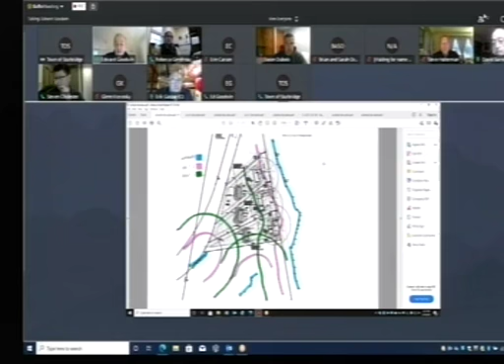Starting with Stephen. Stephen Chittister in favor. Eric Gaspar in favor. Steve Halterman in favor. David Barnicle in favor. Ed Goodwin in favor. Thanks, Becky, for catching that.

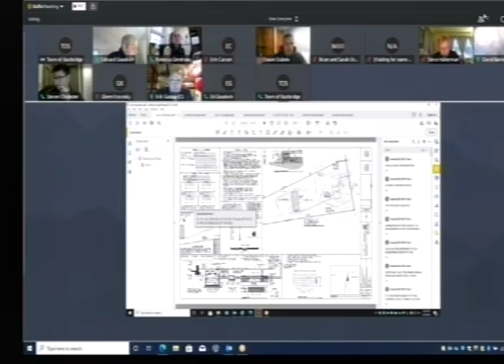What is the time? Right now it's 6:36. Yeah, no, I'm just checking the next hearing starts at 6:35. We are right on time.

We have 20 Cedar Lake Drive, notice of intent, raise and rebuild. No, you just skipped. You skipped number 3. Which one is it? You're at number 5, okay, which is 11 Putnam Road. All right, 11 Putnam, sorry about that.

So we're going to go to notice of intent for 11 Putnam Road, construction of a single-family home and associated site work. Becky, you want to? Sure. So this is a local notice of intent, just subject to our Sturbridge wetland bylaw.

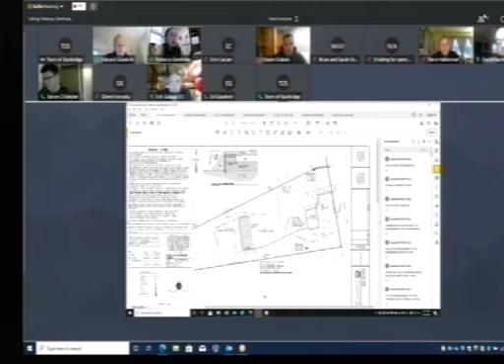We already covered the 100-foot buffer zone, which is just projected on a portion of this site. This is one of the lots, the one to the south, which does have buffer zones projected from the 3 wetlands on site. My recommendation would be to approve the project at this time as shown. As I stated in the previous public hearing, I did go out and do a site visit.

This is an existing hayfield. All work is within that hayfield. The site gently slopes to the left of the plan here, which is the west. I don't have any concerns with the proposed project.

I'd recommend that an anti-tracking pad be installed on the site, as we discussed before, and that sedimentation controls are included at the limit of grading shown on the plan, because there isn't a limit of work shown here. So the limit of grading shall serve as the limit of work for the project too.

That's all. All right, thank you. Jason, anything? No, I don't have anything to add. All right, great, thank you.

David? One question, not comment. This is David Barnacle. I'm kind of curious, Becky, about the approval with the land sloping to the left of the way this is set up on the screen. Isn't that going to offer the opportunity for runoff, after it's completely put into a house lot with lawns, etc., for runoff to go down into the streams?

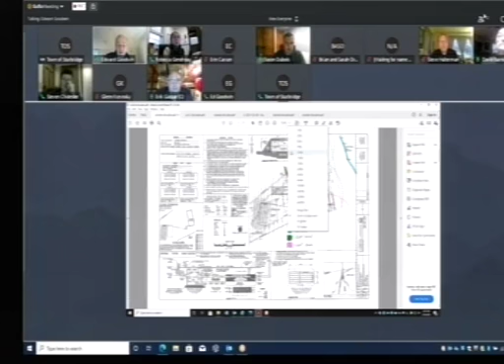Now, do I have a motion on the board? I'll make a motion, Mr. Chairman, David Barnacle, for 11 Putnam Road for a local NOI with the notes as indicated by Rebecca. Eric Gaspar, second.

All right, discussion. Hearing none. Eric, how do you vote? Eric Gaspar in favor. Steve Halterman in favor. Stephen Chittister in favor. David Barnicle in favor. Ed Goodwin in favor.

All right, thank you. On number 11. We're now on to 13 Putnam Road. SWB, notice of intent, construction of a single-family house. Becky?

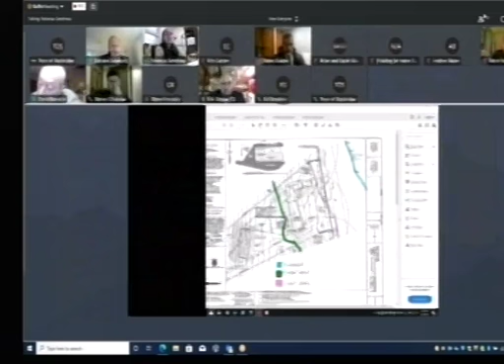All right, I'm just going to share my screen again. So this is the middle lot, and as you can see, we've got the coloring on here. We've got blue wetland flags across the street. We have the 100-foot pink buffer zone shown here, and then the 200-foot here. So the house and driveway portion of this project is within jurisdiction.

Just a note, in my detailed agenda I put 3 wetlands for this one too, but it's just the one wetland. Same thing, I would recommend approval of the project, issuance of an order of conditions with our standard conditions, as well as the anti-tracking pad as previously discussed, and that sedimentation controls are included at the limit of work. The limit of grading shown in the plan, and the limit of grading shall serve as the limit of work for the project.

All right. Jason, do you have anything to say? I do not. Okay, thank you.

Discussion. David? No questions, Mr. Chairman, this is David Barnacle. Stephen Chittister, no questions. Eric, no questions. Steve Halterman, no questions. And Ed Goodwin, no questions. Okay, hearing none.

Jeff, could you see if anybody in the audience would like to speak to 13 Putnam Road, please? Good evening. Is there anyone in the audience that would like to speak to the 13 Putnam Road local notice of intent? Nope, no one's out there.

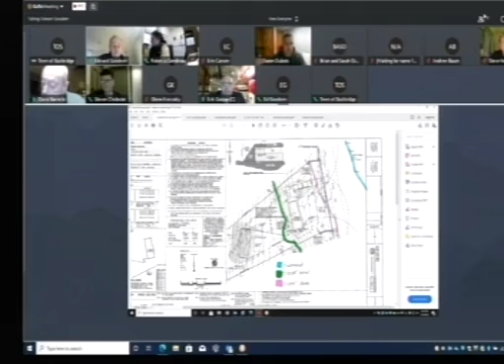Thanks, Jeff. Do I have a motion to close the public hearing? So moved, Steve Halterman. Moved. And Eric? Second. Seconded. Any discussion? Seeing none, Mr. Barnacle, how do you vote?

David Barnicle in favor. Stephen Chittister in favor. Eric Gaspar in favor. And Steve Halterman in favor. And Ed Goodwin in favor.

Do I have a motion from the board? Mr. Chairman, I will make a motion that the board approve 13 Putnam Road, a local notice of intent, with all of the notes as indicated by Rebecca. Do I have a second? Sure, second. Eric Gaspar seconds.

Any discussion? Seeing none, Steve Halterman in favor. Eric Gaspar in favor. David Barnicle in favor. And Stephen Chittister in favor. And Ed Goodwin in favor.

All right, we are on to 15 Putnam Road. Becky?

All right. Let's see. No, that's this one. All right, don't have a colored one. Actually, I have a... Is this the right one? Mm-hmm. All right, so here we go.

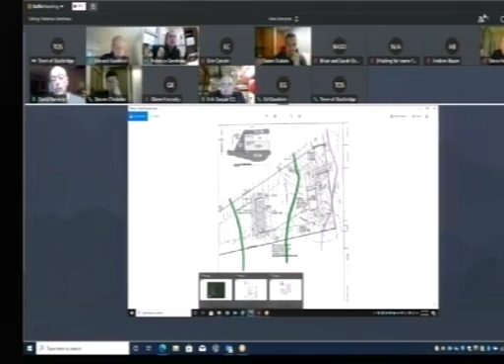Here's the colored plan. You can see we've got the buffer zones. You can't see the resource area on the opposite side of the road. We've got the 200-foot buffer zone, which has most of the work within it, and we do actually have part of the... oh, never mind, I'm sorry, this is the wrong one. Wrong one. Sorry.

Yeah, we'll just go back. This is lot C. I just don't have a colored one ready to present to you. But as you can see, we have the wetland across the street. We have the 100-foot buffer zone projected on the site, and then we have the 200-foot buffer zone projected right in the middle of the site.

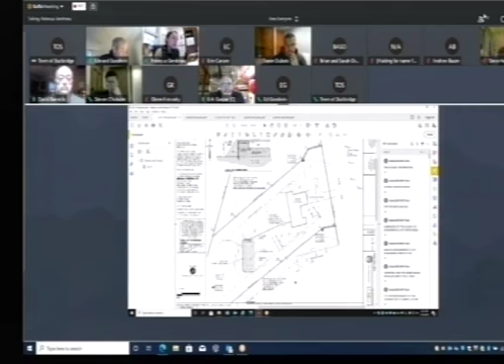Same as the last ones. Existing agricultural fields, everything slopes to the west. Wetlands are on the right side of the road. Most of the work is outside the 100-foot buffer zone. The middle or back portion of this lot is not within jurisdiction.

I would recommend approval of the project as shown, with our normal standard conditions, as well as the anti-tracking pad we discussed with no millings, the addition of sedimentation controls, and that the limit of grading shall serve as the limit of work for the project.

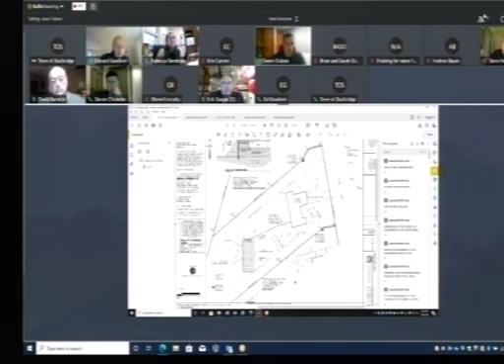Any discussion? Jason, you're all set, right? I'm all set. Thanks, Rebecca.

David, any questions for Jason? Jason, how did you get away with this so we have no questions? I have no questions, Mr. Chairman. Stephen, anything? Nope, all set. Eric? No, I'm all set. David stepped on my joke — I was going to say I have a real problem with this one, but the others are fine.

Steve? Steve, you all set? Yeah, I'm all set. Thank you.

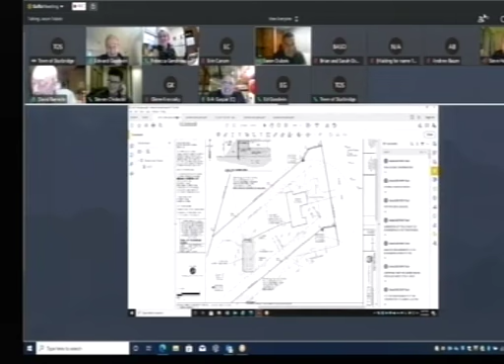Oh, I have a question, Jason — why is this one not colored? The colors definitely make a presentation. Do we do the colors? No, I just couldn't find that one. Eric's been doing the colors on the plans. Oh really? It helps, it makes it nice and clear.

All right, so anybody in the audience? Good evening, is there anyone here to speak to the 15 Putnam Road local notice of intent? Okay, there's no one out there to speak.

Thanks, Jeff. I have a motion to close the public hearing. So moved, Steve Holderman. Steve Holderman, second. Eric seconds.

Any discussion? Seeing none, Steve, how do you vote? Steve Holderman in favor. Eric Gaspar in favor. David Barnicle in favor. Stephen Chittister in favor. And Ed in favor.

Do I have a motion? Mr. Chairman, I make a motion that we approve the 15 Putnam Road local NOI with the notes indicated by the agent. Do I have a second? Eric Gaspar seconds.

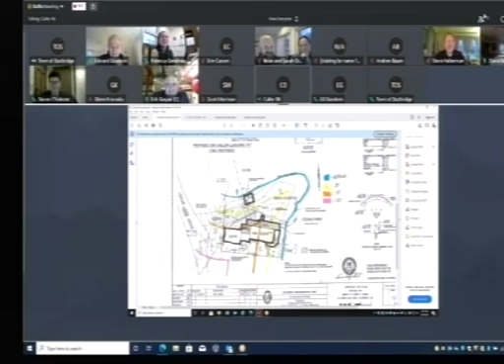Getting back to this — the property was owned by Brian and Sarah Oxman, located at Cedar Lake off Cedar Lake Drive. They originally purchased lot number 20, which had total coverage at the time of roughly 34%, and later purchased lot 13 beside them, giving a total area of 13,650 square feet.

It becomes a little misleading when you look at the zoning for the suburban residential district — the original coverage was 17.22%, and now we're going to 23%. The figures don't lie, but liars figure: the property they originally owned, lot 20, actually covered 34%. So what they really did, in January with Davis and George in Sturbridge, was record a plan done by DC Engineering in Worcester that brought the property up to 13,500 square feet.

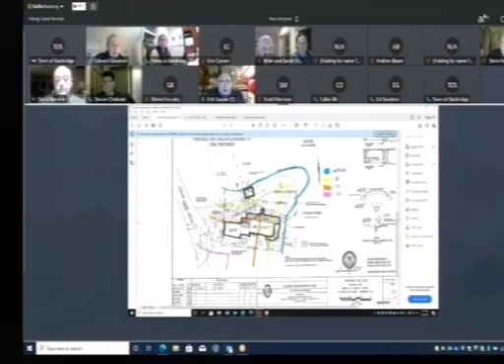David, did you have something you want to say? I need a second. Do I have a second to the continuation, Eric?

I'm a little confused as to why we would go and do anything without ZBA weighing in, because it seems like an incredible waste of our time to put a decision in place and need their weigh-in. If they're not going to approve the lot as a conforming situation, we will have gone through a tremendous amount of effort for nothing, and the Oxmans will go through alternative plans that will cost them money as well. I think the best course of action would be to continue this until the first week in May, have them go in front of ZBA on April 21st, and then allow us to have a productive discussion. Continuing it just to continue it will waste everybody's time and the Oxmans' money, which I don't think is fair.

Let me give you an alternative point to that. They come before our board with requirements. If they bring us the requirements we ask for in coming to the board, we need to look at them and give our input. If you do the board thing, they can go round and round and round, and that's not fair to the applicant. I admit the engineer should be given guidance on what he thinks he can get past and what he can't, but that isn't something we should be doing. We should set it up so they can come before us. If they don't want to come April 6th, they can come some other day, but if we have that date available, I feel we need to entertain them.

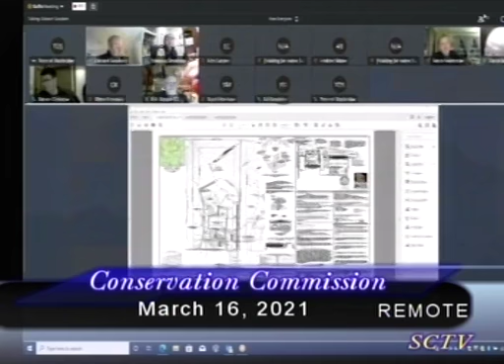Okay, so this is a local notice of intent that we received. I've got it up on the screen for you. Upon review, it came to our knowledge that this property was a lot that had been divided off, but then an A&R plan was submitted and it was rejoined to a larger property. So we had the question about the application including the 566 address and an abutters list for 566, while the plan references this as an existing property line. We did ask that question to the engineer, and I'll go into that a little bit more.

Overall, this is a site we have been to. I did go back out just to check that none of the previous conditions had changed. Nothing had changed, just that they had done the perk test out here. What we're looking at in green is our 200-foot buffer zone. We also have a 200-foot vernal pool offset shown on the plan, right where my cursor is. They're not proposing to do any work within the vernal pool offset. You can see that about half of the development of this lot is within the 200-foot buffer zone.

They do show BMPs during work, and in addition, some BMPs on the site afterwards, including infiltration for impervious surfaces, including roof runoff and the driveway. One question I had was whether the infiltration on site was for the entire roof surface or not. I'd also recommend the inclusion of an anti-tracking pad on the site.

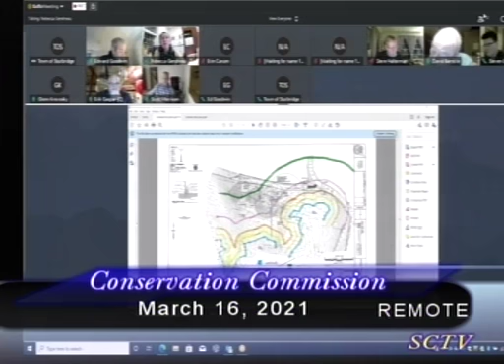We'll start off with Becky. Okay, I'll pull up the plan for this. So this is a notice of intent we received. It's for the development of a single-family house and associated site work to include an on-site septic system and well, as well as a barn. The property as part of the application is actually 91 Clark Road, which the NOI was filed for, but also 97 Clark Road, as where we're looking at the driveway. The project proponent is working with the adjacent property owner to purchase a portion of that property in an effort to locate that driveway further from the wetland there.

So we actually are looking at this time work on two separate properties that wasn't originally included with the notice of intent. It was just for the 91 Clark Road. It's my understanding that the A&R plan was filed with the planning board and approved, but I haven't been notified if it's been recorded yet. So similar to the last project, we have work on two different properties that weren't reflected within the notice of intent. I didn't realize it until after we already drafted the legal ad and added this to this meeting agenda. But since my understanding is they're working towards making this one property, once that A&R is recorded, then we will have the one property address. So for that reason, I'd recommend a continuation to have that resolved.

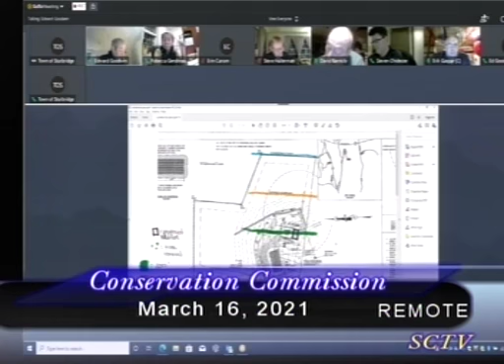Becky, we're on to 14 Wildwood. Correct, yep, so this is a request for a wetland bylaw letter permit for 14 Wildwood. I have the plan up here for you to see what we're looking at.

Wildwood is a private road, runs down the bottom portion of the plan. This was the plan when the house was built, which we found and provided to the current owner. We have an existing driveway that comes back, single family house here, septic system in the front. What they're proposing to do—we have the wetland edge from that plan shown in the back, with the 100 foot and 200 foot buffers. So what they're looking to do is remove, it's 5, maybe 6 trees. One of the trees is right on the edge of the buffer zone here within jurisdiction. They're also putting an addition onto the single family house right at the 200 foot buffer zone.

Outside of jurisdiction, they will have a driveway that accesses the new addition, as well as some tree removal pretty far away from the resource area. So they'd like to move forward. Their plan right now is to remove the trees at this time, and they're still working on their final plans for the house addition.

We did do a site visit out here. I would recommend, I don't have any concerns. All the trees were flagged, and we did see them back there. Most of them were dead, or had some health looking concerns to them. And they're pretty far from the wetland. All the rest of the site past here is all forested upland area. So I would recommend at this time to approve the project.

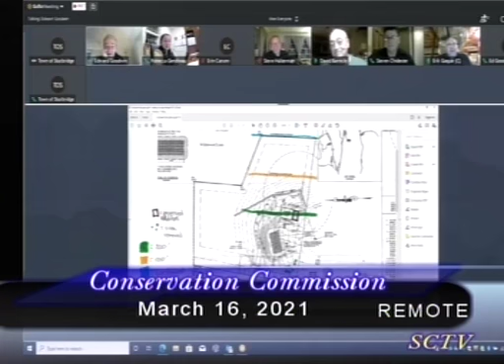Well, rain or shine, I can make it both days. Oh man, you are the mountain man. I'm an ex-field biologist with so much foul weather gear that I can do anything.

Yeah, Becky, breaking it up into 2 is probably better for me, so I should be able to make both those dates.

Eric, you're not going to be here for the 23rd, right? No, but I can make the 30th, I have that in my calendar. That's what you've got, Beck. That's pretty good. Okay, thank you guys.

I'll send out an email on Friday with a schedule, and I'll keep the 91 Clark and a couple of the smaller ones that I can take photos of and provide to the other members, and keep those bigger notice of intents to the 30th, so that way Eric can see them too. Good.

Committee updates. CPA, we're meeting, I think the 22nd. We've got a meeting coming up.

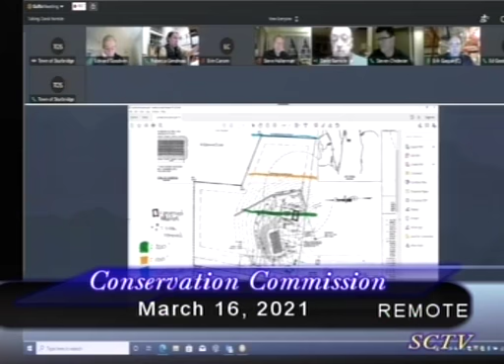David: Trails Committee meeting was last week, and there was a lot of activity relative to Long Pond facility, with comments even from Opacum because Tom Chamberlain had sent Opacum a list of things that had happened at the Trails Committee meeting to keep them up to date. So there will be 3 trails developed on the Long Pond property, and the gate will be ordered and put in within the next 2 weeks. Within the next week or so, there will be a crew in there moving the gravel that is blocking the trail entrance and spreading it into the dip in the road bed.

Oh, it's a trail bed right now, but what will eventually become a road bed, which is now filling with water so it just becomes a mud hole. And the trails will end up all the way on the opposite side of Long Pond over by the Army Corps of Engineers property, which brings up the fact that this consortium of the Mass Transit Group and the Army Corps of Engineers is getting together relative to replacing the bridge.

When that comes before us, we should remember that it would be really appropriate if we could get a better clearance under the bridge area. At the present time, even a kayaker has to lay down inside the kayak to get under that bridge. It would be really good if we could set it up so that a canoeist could get under that bridge at high water without having to become a contortionist. So we have the opportunity to talk about that at the time.

And the last item that they brought up was the business about... David, can I interrupt you? Yes, what bridge? Which one under the highway? Champeaux Road. Oh, Champeaux Road, okay. Bridge at Champeaux Road. Okay, good.

Because the end of the Long Pond Trail is going to be right where the picnic area is at the Army Corps of Engineers site. And Champeaux Road empties right there. That's where the parking area is, Champeaux Road, for the Army Corps of Engineers.